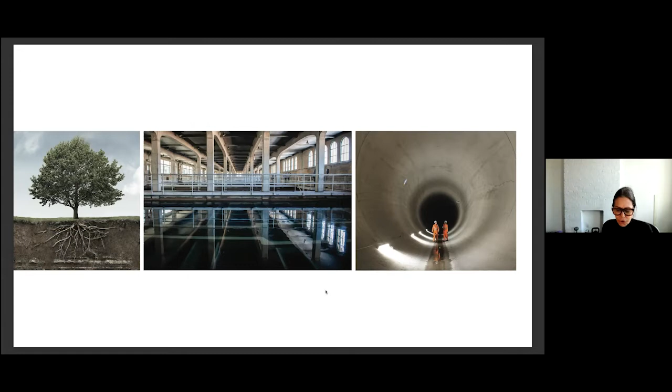This practice is about 15, 16 years old. At the outset, because we're both landscape architects and architects, we spent time thinking about how that would affect our work — not just how we could position ourselves as a practice, but what that meant for how our work could be different. So we started thinking about forests and buildings — this slide is actually from an exhibition we were asked to participate in at Harbourfront Toronto many years ago. We started to think about...

urban forests and the rebalancing of buildings and tree planting. The slide on the left looks a bit ridiculous to me now — again, 15 years ago we posited that all the leftover spaces in Toronto, at-grade parking lots, gaps between buildings, could be forested as a way of really improving the environment. All those sites are now condominium buildings, so it's a slightly ridiculous proposition. But the thinking was about how we could improve the environment by planting more trees.

Toronto already has a relatively decent tree canopy, but we know trees are great carbon sinks — the bark absorbs carbon dioxide and exhales oxygen. We know that in terms of managing water, something like 100 trees can manage about 100,000 gallons of stormwater a year through storage in leaves and bark, and how all of that can flow back and recharge our water table and the aquifers.

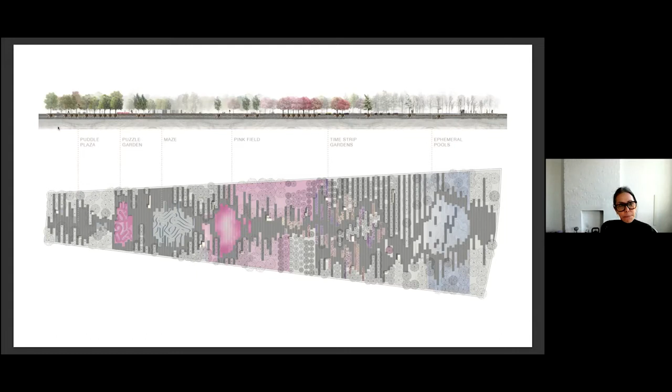So this voice print, through graphic manipulation, became the forest floor of the park—that's all the granite planks you're seeing there. That voice print also helped us manipulate the tree planting into a series of tree clearings, where the programmatic events of the park happen. But all of that is happening amongst very intensive tree planting of native species, to ensure we're managing the water table and the life of the forest floor in the most efficient way possible.

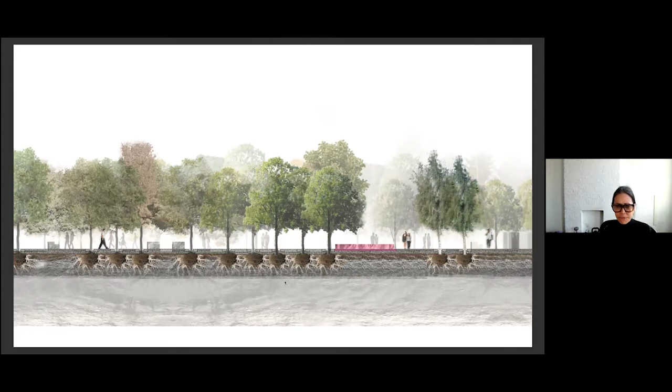The canopies of the trees, and the root systems and how they carry water in a symbiotic relationship when planted close together, was all of interest to us in this project. You'll see this as a recurring condition across all our projects—a focus on one or two elements and getting that right. So the forest floor was absolutely key, in terms of ensuring it was permeable and allowed water in.

We used a kind of permeable recycled rubber. These are the trees being planted, and they're planted super close together. Most urban foresters would say this isn't great, but the goal here is really to get the roots close together, so there's a conversation within the trees' root system, and the canopies also grow up into one continuous canopy rather than producing specimen trees.

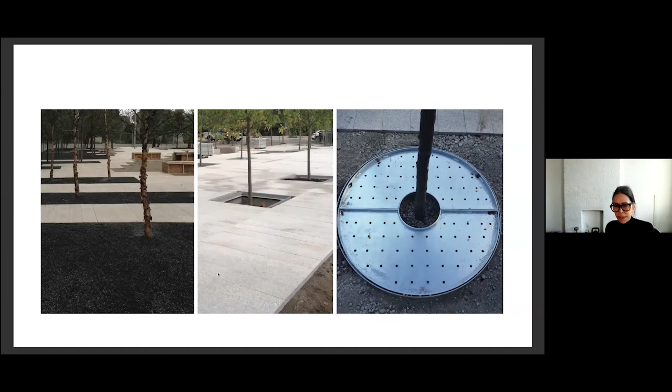So all of the planting conditions of the trees are hugely part of the design and experience of the park—trees in granular surface, trees in granite planks, trees in tree grates that can take this porous surface. A combination of all three conditions is part of the experience and design of the park.

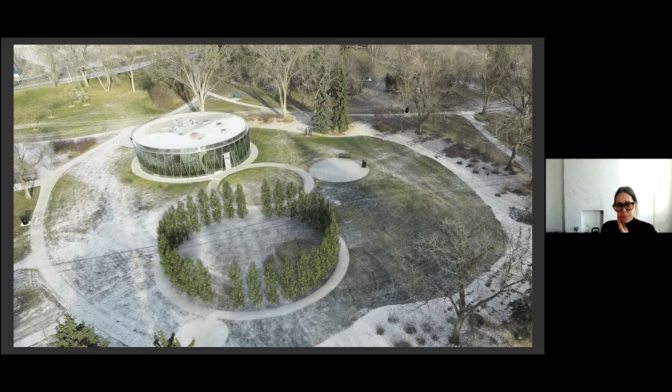Just a couple slides on this Borden Park Pavilion. I put it in because it really talks about the balance between built form and tree planting, or the urban forest. This tree room was put in after the fact, but it was always part of our early thinking about the building—a kind of balance where the damage you do by sealing off a site can be corrected by the number of trees planted adjacent to it.

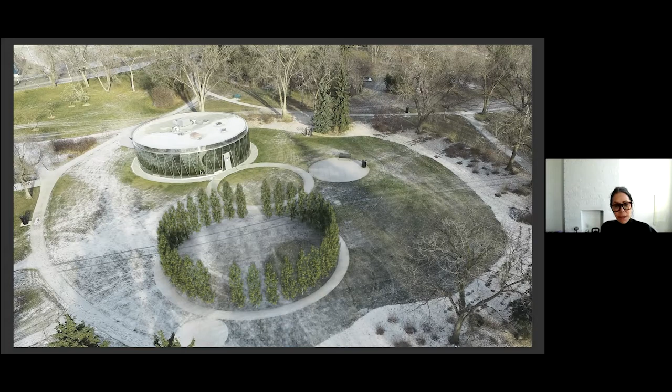I advanced through a lot.

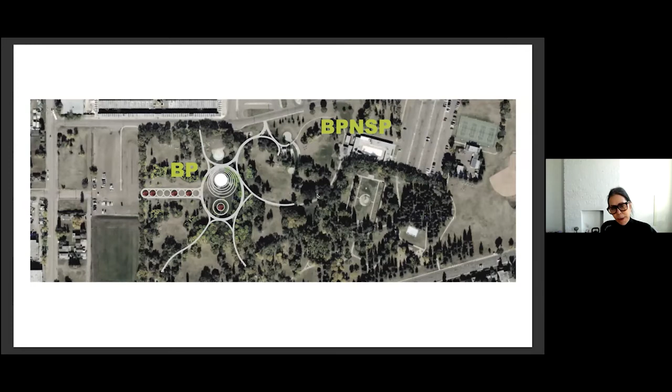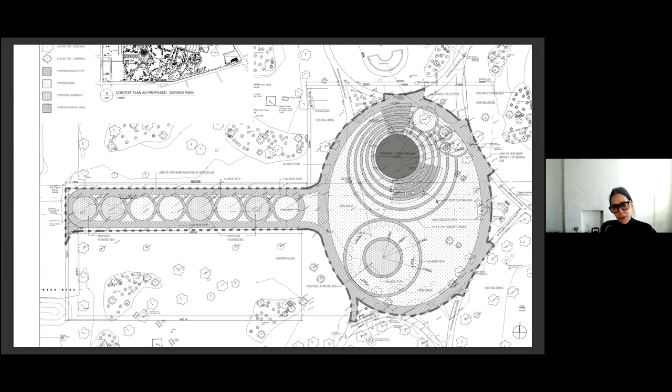So this is an Edmonton project, in a park called Borden Park. Borden Park is designed in the picturesque tradition of Olmsted or Capability Brown. That means it's partly curvilinear paths, but it also has axial moments through the park. This is a plan, so you can see the location of the building, with concentric rings around it, developing some symmetry across the axes through the park.

The pavilion is really about collecting all of the program and putting it into the center of the building, so that the perimeter and being able to ambulate around the building is as immersive within the park as possible. Again, the evocative, play-like feature of this building is intentional, so people can experience it in multiple ways—that's really important to the thinking of our practice.

The glass surface of this building has a reflective coating to deal with heat gain during the summer. What that results in is a building that's highly reflective, so during the day, depending on the season, it has quite a different appearance from the outside. And at night, obviously, it changes again. Projects that are dynamic, that people can experience differently day to night, winter to summer, are huge opportunities we try to capture in our projects.

Borden Park Natural Swimming Pool is on the same site. There's a long tradition of swimming in Borden Park—I think this was a dugout from the 20s. Before that, it was actually just a pond. There's the location of the pavilion, and to the east is the location of the pool.

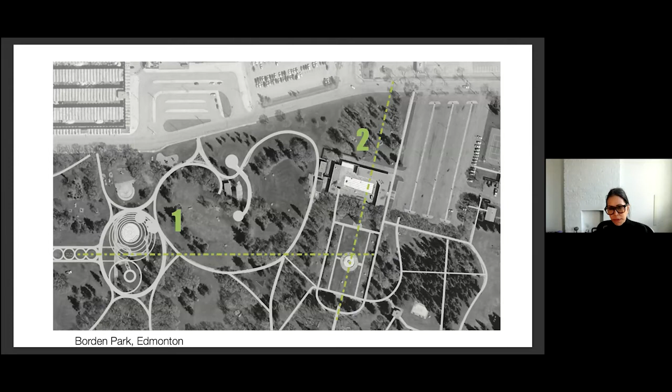Our pool building replaces a pool building that was constructed in the 60s, minus one wing that we kept for some of our mechanical equipment. This is a project that's really about cleansing water and conserving water.

But the idea that we needed to achieve purity and cleanliness of water for a pool is absolutely fundamental to a public swimming pool.

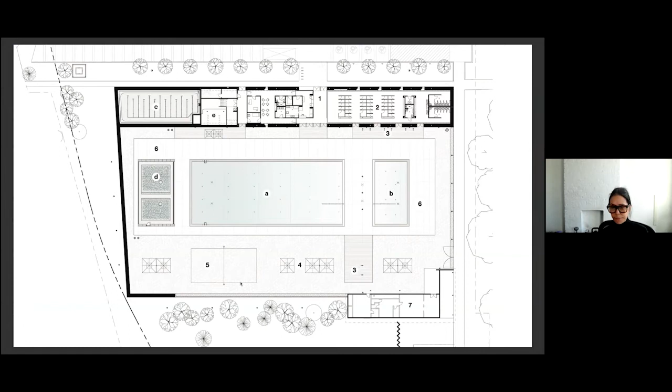Excuse me for a second.

So the entire building is constructed of gabion baskets, again to evoke this idea of stone, and to think of this as a seasonal building that can actually also be permeable and breathe in its own right.

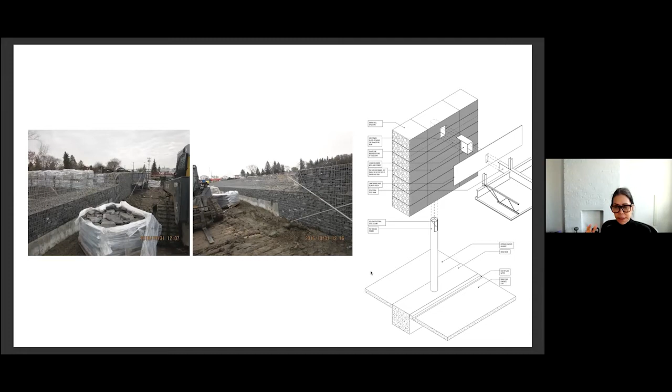Some images of that under construction. We used a local black limestone for the building on the outer layer of the cages, and then some systems drawings showing how the structure of the building is embedded into those gabion walls.

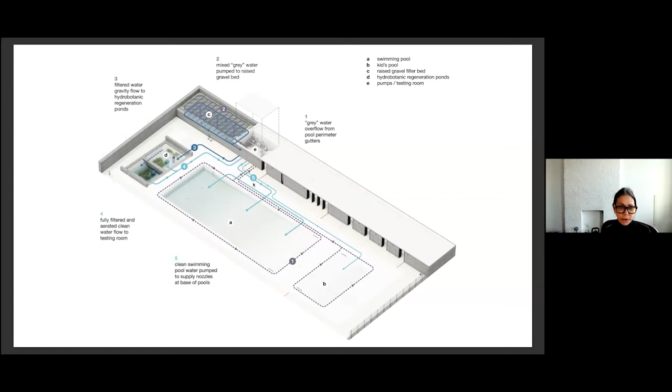So here you're looking at the granular filter, the top of the granular filter, and the two other water filters. And the wall, this gabion wall that surrounds about 65, 70% of the property, located on the north side of the site, which makes a great heat sink in the early and later parts of the swimming season, because Edmonton, like all of Canada, doesn't get guaranteed four months of great weather. So being able to put your feet in the sand and lean up against a heat sink is a pretty important part of that.

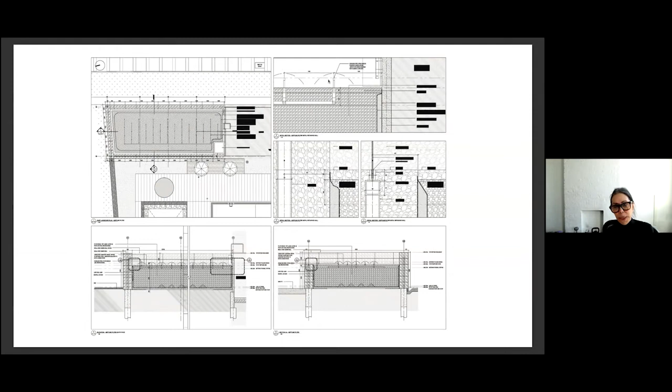These are some images of working drawings of that granular filter. You can see the size of it there, and the hoses or nozzles that are spraying the pool water over the surface. I just put this in - I don't know exactly what it is, but I could have put in a kind of carbon filter that you'd have in a regular drinking water container. It's really simple, everyday sort of thing - water flows through granular material and comes out clean.

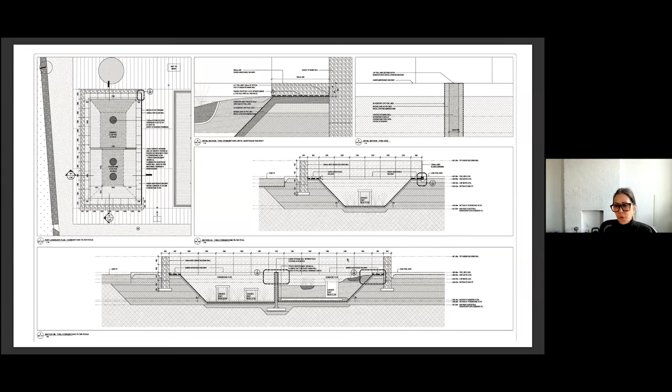And these are some images of the hydrobotanic or the water filters. So there's two of them. One of them, we call it a submersive filter, and it is for reed plants. Mostly what that particular filter does is oxygenate the water.

And then the pool next to it is the hydrobotanic pool, and it is used for the growth of zooplankton. So it's got blanket weeds on the top of it, so that underwater it is kind of dark, which really fosters the growth of zooplankton - these little creatures shown and magnified like a thousand times over. Zooplankton is in the water for the control of algae.

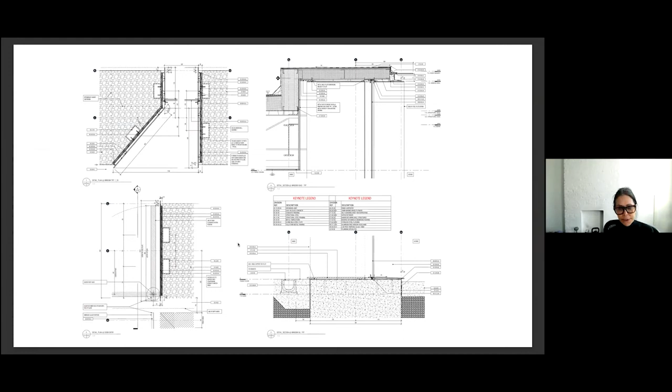Some details of a kind of secondary material that we use to make parapets and window liners - that is a kind of mild steel that makes all the doors and the parapets, which have been powder coated with a clear coat.

So all of these rooms open with these large pivoting doors to the outside, and also provide long continuous views through the pool. The doors also help to give impact, as it's about a meter wide depth of the gabion exterior walls.

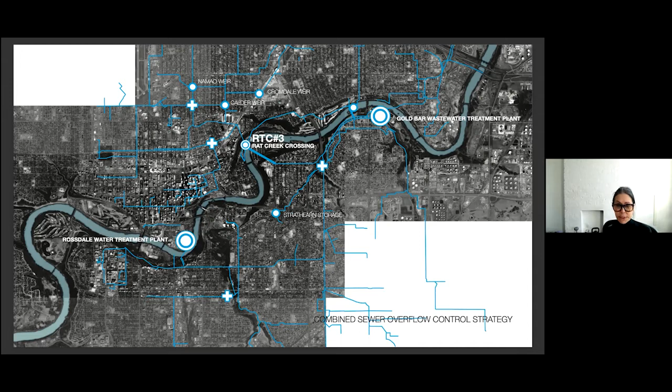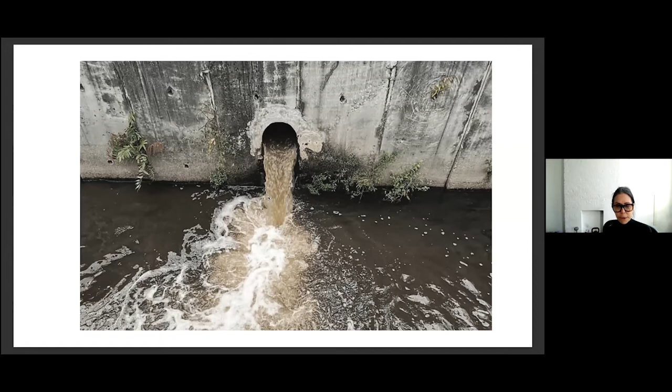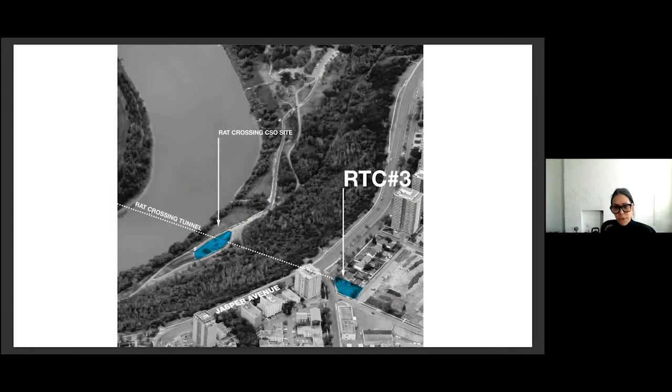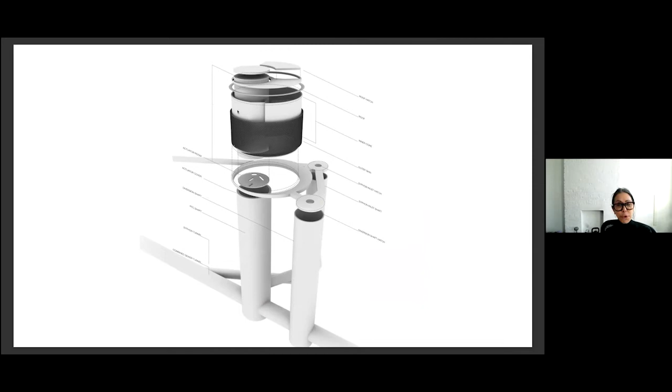This is where the building is located - it's just a little button of a building. This diagram shows the sewer trunk, the main shaft for the building, a siphon shaft, a diversion shaft, the actuator room that houses the gates, and a removable roof so that it can occasionally be taken out and repaired.

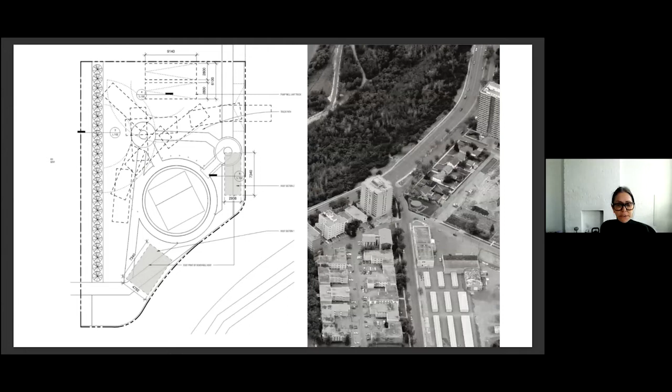That's what it looks like on site - it's a cylindrical building. What's not so obvious in the plan is that we've also telegraphed up to the surface the other two shafts and the connecting infrastructure below, so there's a sort of legibility or didactic quality to the building for those curious enough to ask what the pattern on the site is.

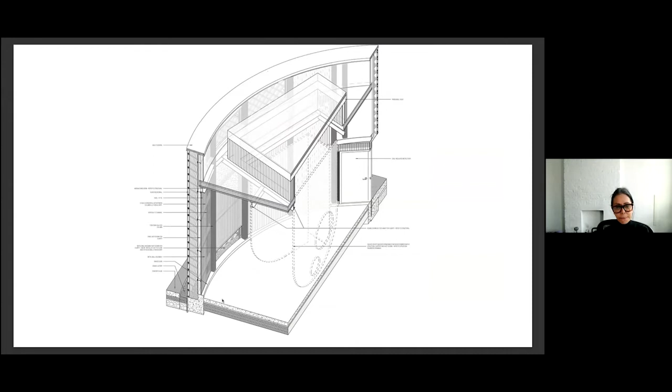And then we developed this - all of our projects, everybody's projects have budgets. These projects, even infrastructure buildings, have pretty rigorous budgets. But we did manage to develop this project with a double wall, using a certain material. That's the first level.

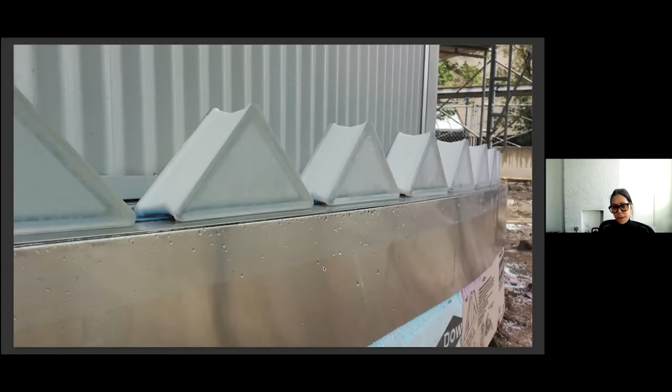We used a material that's commonly used in Edmonton, which is glass block as cladding. In this instance we found a really quite beautiful block with very low iron content - it's white, with a kind of sandblasted surface, giving it a matteness. Then we decided, after many iterations of how to deal with the glass block, to rotate it so it's all organized on a 45-degree angle.

So that's effectively what the building looks like. There's a wall section description showing the cavity there. The building is surrounded by bollards.

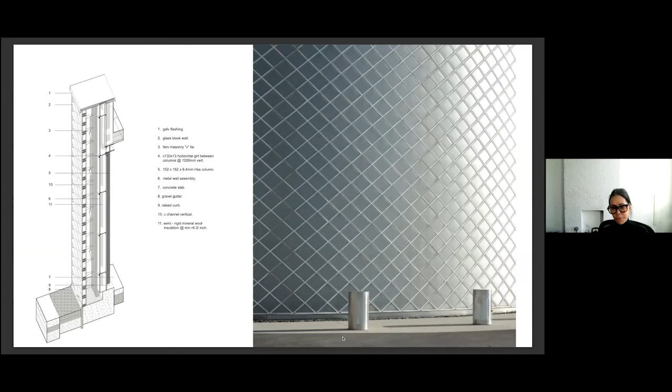Again, this is a sort of one-material, detailed building - to restate, June Callwood Park was all about the tree grade surfaces, Borden Pavilion is about the triangulated wood and the really minimal glass detailing, and about the sort of breathable, material-oriented concept.

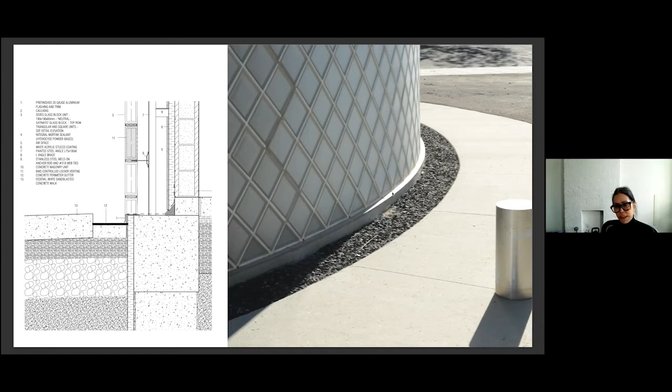And this building is really all about the glass block and how we detail it - at the base with a gutter, at the bottom of the building with a stainless steel cap, same with the stainless steel cap at the top, and then a plenum that brings air between the glass block and the steel cladding, the inner lining. These details are absolutely key to getting this right.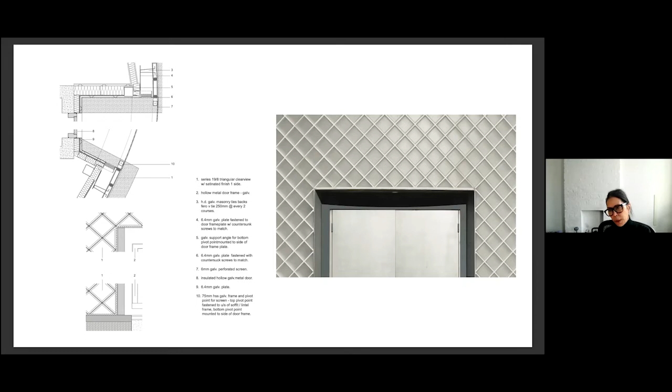Understanding how many blocks we'd be using at the head of the window is an exercise in counting. We also needed control joints, so here's a model of how we're going to do them. In this view you can see, if you follow the zigzag, it's really quite integrated into the building - these are key details for the appearance of the building.

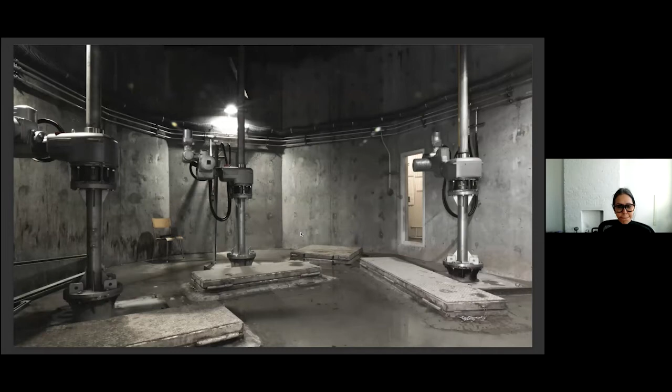Again, it's important that people understand these buildings and ask questions about them. This building, because of its plenum, allows for some illumination, so it can glow at night. Here's the view of the actuator room, and that's the view of the building in the evening.

So this is the last project. I hope I have time.

SWF, it's had many other names, but right now is only called Stormwater Facility. This just recently opened about a year ago in Toronto, although we started working on the project in 2010.

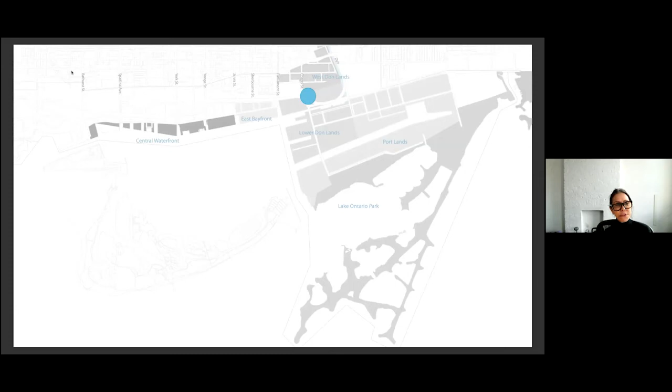This is the location of the building within the eastern side of Toronto. Downtown Toronto is over here on the left. What's great about this building is that it is a recognition for these three new neighborhoods being developed by Waterfront Toronto, that stormwater should be separated from sewage.

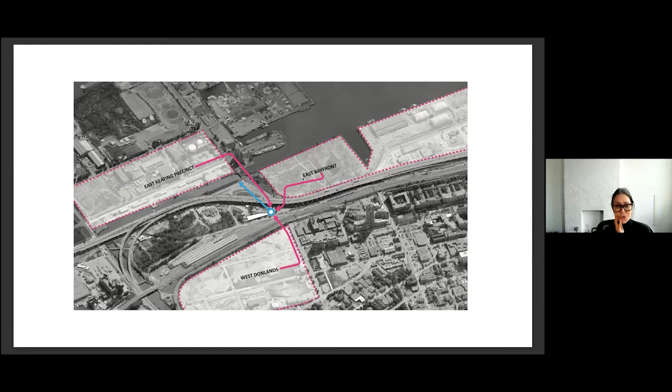So these all have separate stormwater facilities, but notwithstanding that, stormwater is still pretty dirty. It's kind of interesting how bad it really is. So yeah, that's why I have another nasty slide to show you.

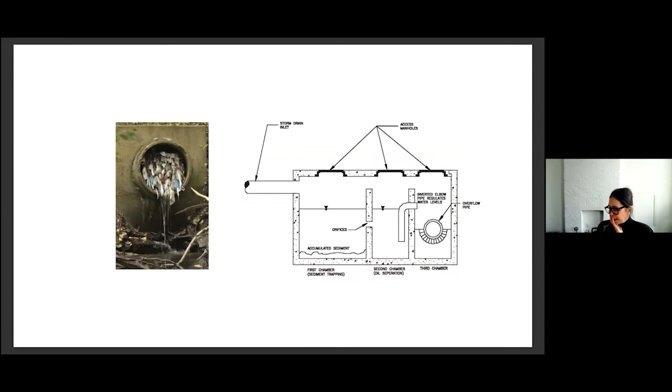So this obviously didn't go through an oil grit separator, but just upstream from the SWF facility is an oil grit separator, which deals with hydrocarbons, sedimentation, but tons of junk, like plastic bags. The people constructing the building, Graham Construction, kept saying the stuff they found in the shaft that had gotten through the oil grit separator - like knapsacks, needles, cigarette butts. You can just imagine what goes into our sewers and how absolutely critical the cleaning of that is.

And again, I stress, unless you work on a project like this - many people are way more knowledgeable than I am - you just don't really know how bad this water can be and how irresponsible we are sometimes as citizens.

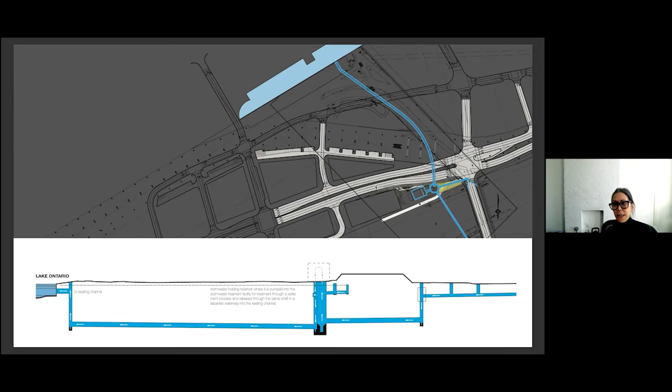So just a quick diagram about how water flows into the principal shaft through siphon effect, delivers water up into the plant, back down, eventually goes out into the Keating Channel, and then into Lake Ontario. And that's a plan diagram of pretty much the same thing.

The Gardiner separates the site from the water, but it's really in an area with the new neighborhood, the Canary District, home to many thousands of people. But it's also in this infrastructural zone where heavy rail transit, commuter transit for GO Transit, is located just to the north, with a major hydro easement directly to the north of the building.

So our early conceptual thinking of this building involved an interest in stone and water and what that evokes in terms of water quality and water purity - the idea of a well, in this case, an idea that you would invert the well and the well would become the vessel. Many different iterations of this, of course.

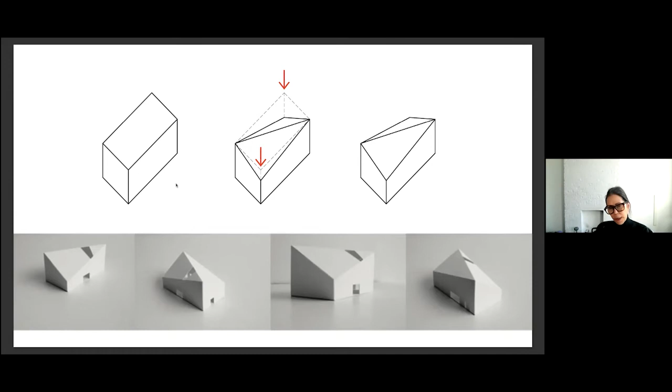I'm just showing you what we landed upon - this manipulation of a simple volume, and how we could manipulate it so that it actually tells the story of water. The pitching of the roofs helps show, in a rain event, how water is being managed, how water flows across this building, to make that experience for the citizens of Toronto more evocative.

There's a 3D model of that. I think it's super important that the way we think about the landscape is the way we think about the building. In this case, this cast-in-place concrete building has a comparable surface on the ground, that's been pulled back a little bit - we don't have as much of a plinth now.

We're waiting for a kind of second phase of construction for that. But there's a similar material that unifies the ground plane with the building and shows the shedding of the water.

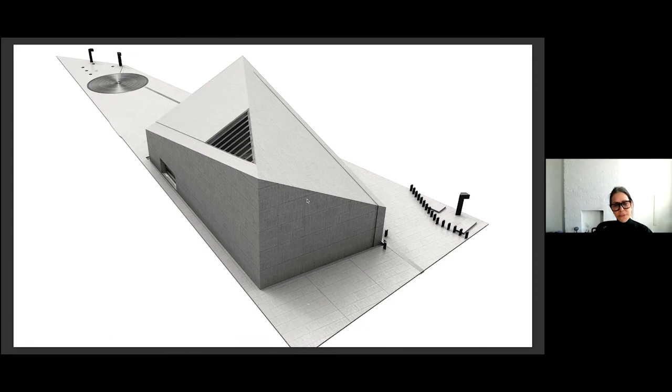That story is further articulated by gutters that are cast into the wall, into the roof of the building, down the wall, perimeter gutter of the building, and then carried to the shaft and collected into the major shaft.

Again, very straightforward cleaning of water. It starts with the principle of sedimentation, which is the same as Borden Pool, which is kind of the same as R.C. Harris. But anyway, here's the shaft.

Water comes in. It goes into these sedimentation tanks, which is about water settling. In this instance, it's sped up with a chemical called alum, which coagulates the solid particles in the tanks. So sometimes they're called flocculation tanks.

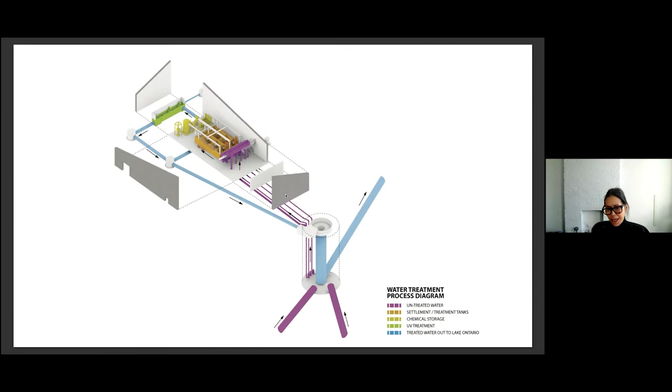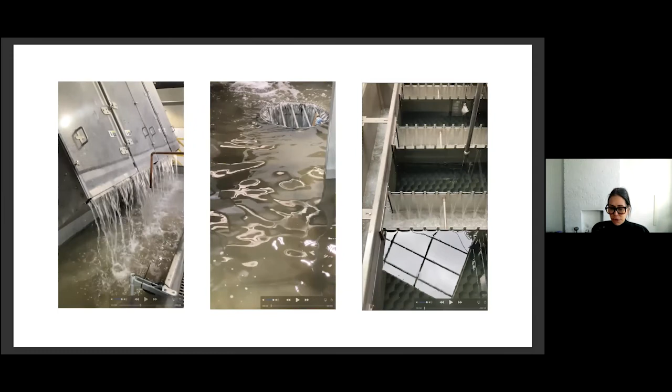And this is not actually a Keating channel, but this is sort of what it would look like when it gets discharged back into Keating channel.

This is important in the way that we work in the office. We work three-dimensionally. We do a lot of renderings. We like to compare what we render. We want to be as certain about what we're building as we can be.

So this is the completed project. It's actually fenced off right now, and we're waiting for Lakeshore Boulevard to be reinstated, so that we can complete the landscaping of the plan and that the site can be open to the public.

This building, it was important that the roof and wall and the ground plane to us was of like material. So the choice of a cast in place building was sort of logical. We could not afford a sandwich panel building.

So this is a kind of modified barrier wall rain screen building. The 400 millimeter thick cast in place wall really doesn't allow for much moisture, but if moisture does get through, there's a rain screen and a gutter system on the interior of the building to manage any moisture.

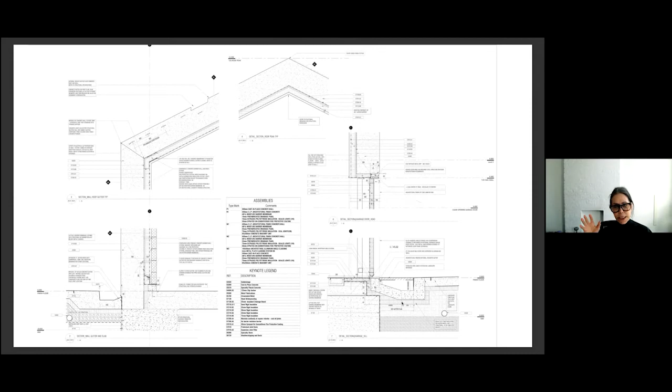Again, the development of the gutter and how all of the gutter and the ground plane connects with the rest of the building is a really important part of the design considerations.

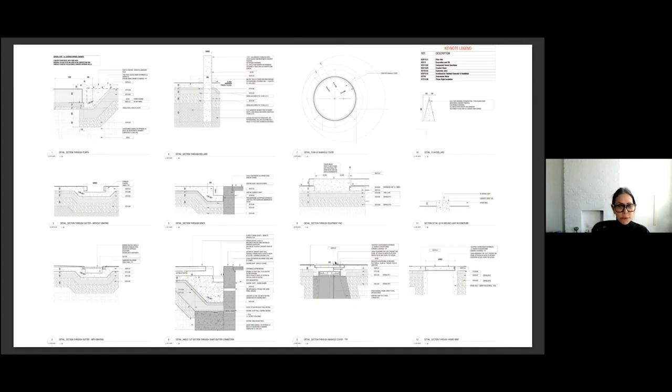So some renderings of the gutter, renderings at the moments where we have to get access into the building. And then I just include some details about the landscape, just to reiterate the importance of the connection of the building to the horizontal surface of the ground plane.

We had nothing to do with the design of the shaft, but we were pretty intrigued by it. So we rendered it anyway, because we think it's an important part of the story.

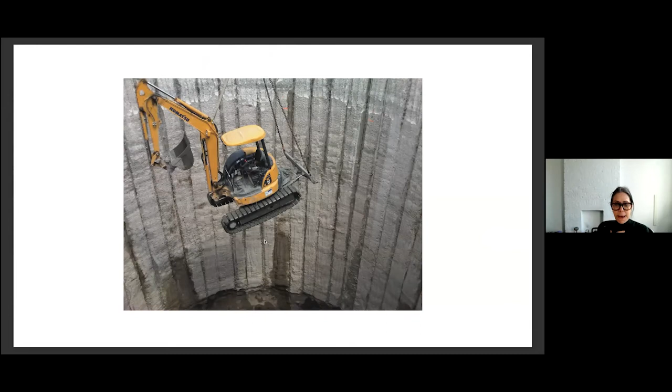We also photographed a lot of things during construction. This one in particular is sort of incredibly cool. The shaft is about 300 feet deep, about 60 feet wide in diameter. So it can manage a lot of water.

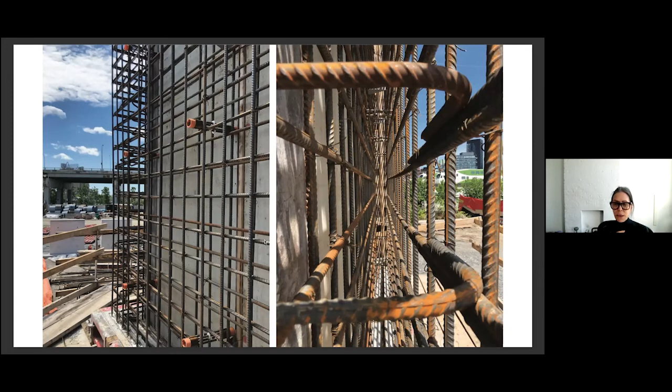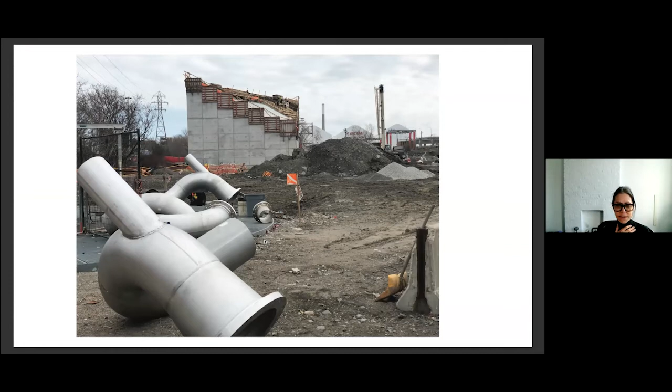It's just under construction, and then an image of the size and scale of the infrastructure that goes into a building like this is pretty remarkable and very, very cool in our mind.

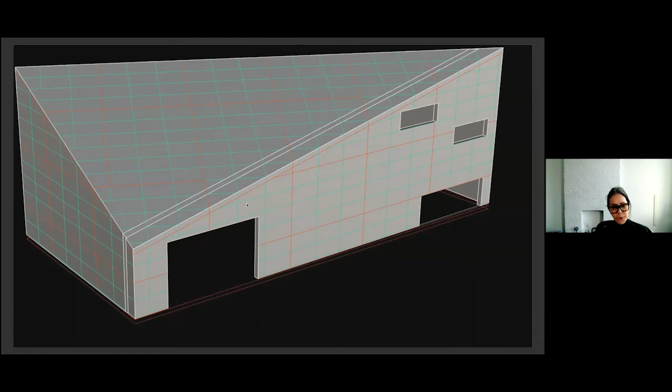And then to get it right, we included these, which we use for shop drawings, but also to communicate with the contractor, to work things out ourselves - the importance of understanding how the control joints of the building could be continuous, that the board plywood of the formwork would be continuous wall and ceiling. So it's not just the material, but it's all of the math behind all of that.

It's absolutely key that gets executed in an absolutely consistent way, even to the extent with this fairly strong pitch organization of snow guards on the roof.

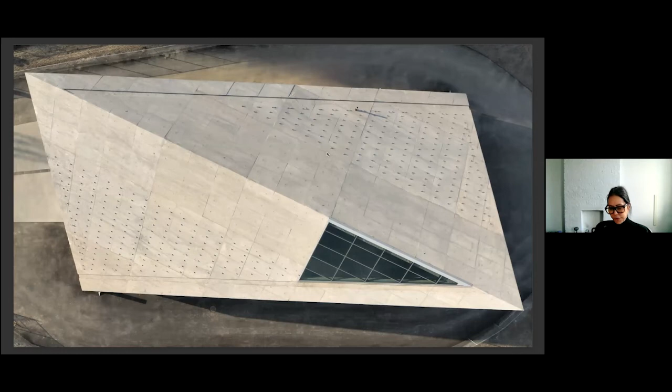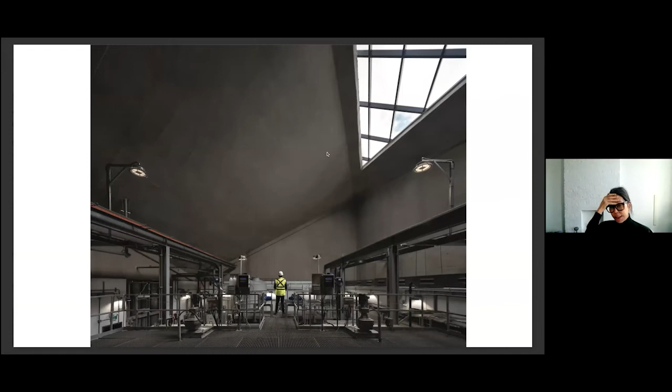As a major skylight—we've done other infrastructure buildings I'm not talking about today—it's well documented that the introduction of natural light greatly improves the quality of the workspace. Some images of that skylight, which is very coplanar on the outside with silicone joints so that it reads as monolithically as possible.

Yeah. I'll stop sharing—how's that? Herb, you're muted.